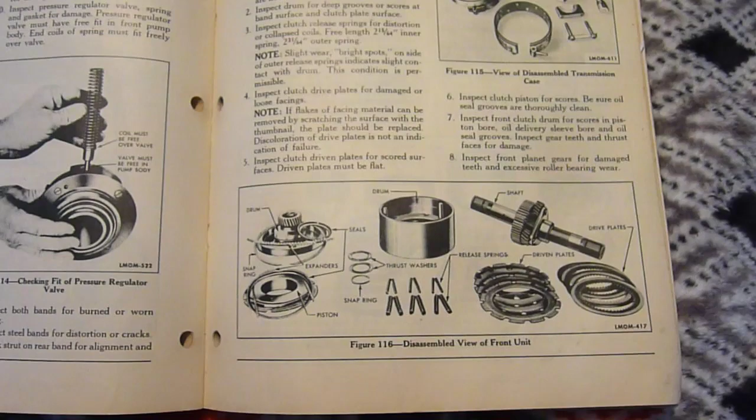So here we have a front hub. It's got springs right there, a pair of springs for each peg. It's got the metal and the fiber plates - these are the metal ones, here's the fiber. Here's the clutch discs, friction plates. They call them drive plates in this manual.

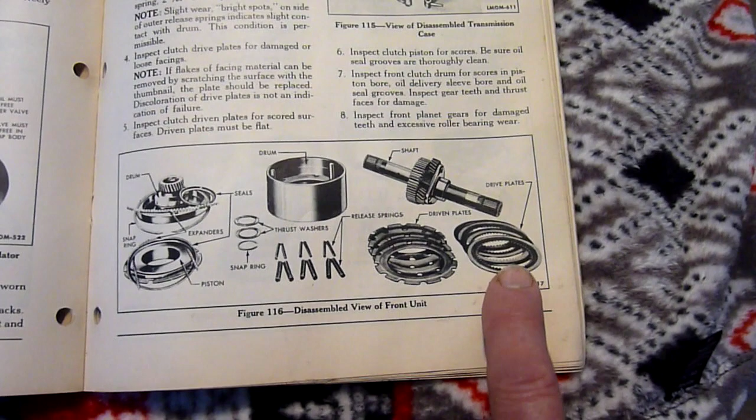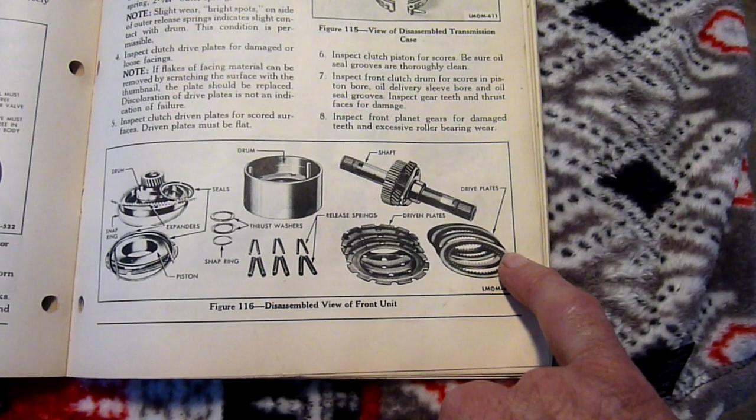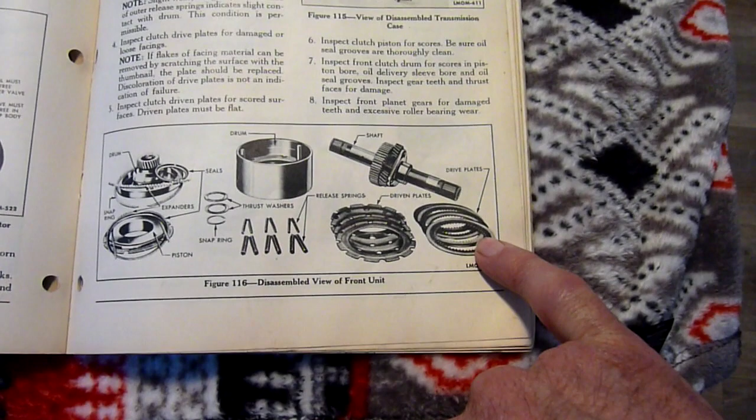This is a Lincoln manual, but it is a Hydramatic transmission. In this one you can see they're showing a dark portion and a light portion - the light is the cork, the dark is the fiber. It goes with the outer, and they're opposite on the opposite side, so it goes with the fiber outside edge up. When you have this down on the bench with the pegs sticking up, it goes inner cork, outer fiber should be visible, and then a metal plate.

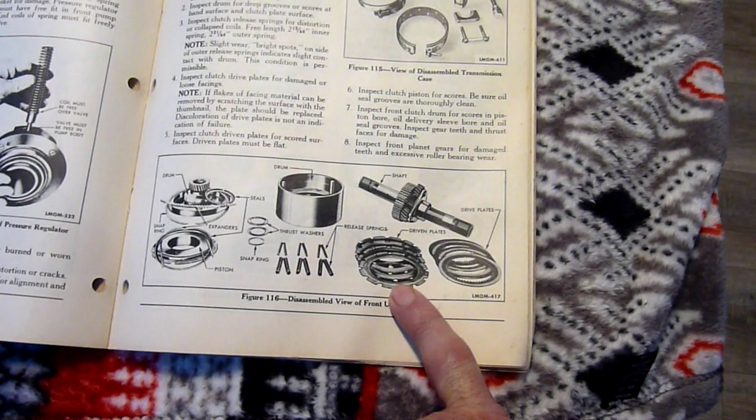One of the older videos - or the newer transmissions, into the 50s - mine is a 52, but 53 and up apparently use a different number of plates, driven plates and friction plates, and also make reference to a cone shape of these plates. Mine does not have that - these are flat. I could not see any difference between them, so it shouldn't matter which way they go in.

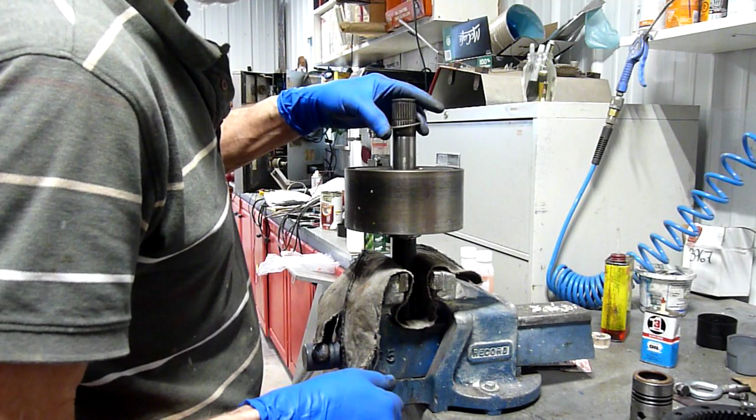So you want these to move freely, so there's a rounded and a squared out portion. The square portion goes over the pegs, and the rounded portion goes over the springs.

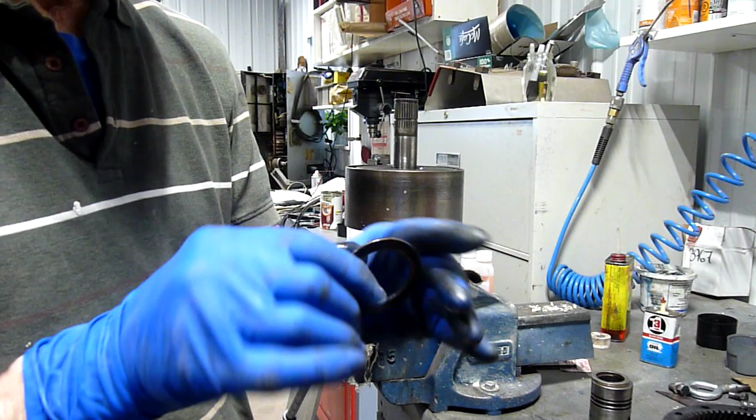When I took this apart, this being the front hub gets a spiral band around it, and this gets a simple unidirectional band - it's the rear hub clutch pack. There was a thrust washer down in there underneath the clip, the retaining clip. The manual makes no mention of it and has no pictures of it, so I'm not sure why it was in there.

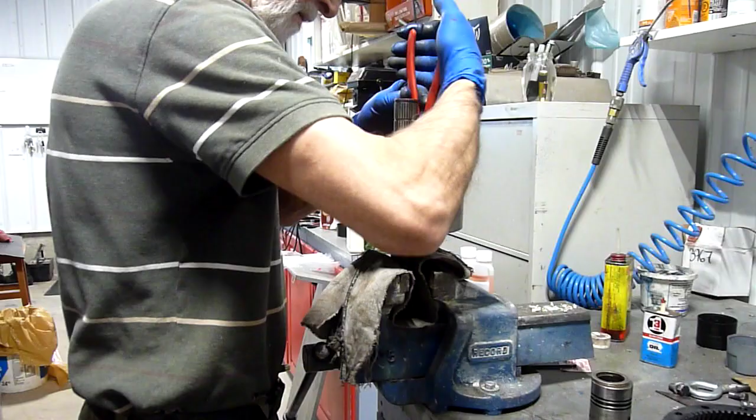I'm leaving it out. I have been trying to illustrate how to reassemble this transmission using old videos and pictures, and it's just not working out. So I thought I would take apart this old one and show you how it comes apart as far as the clutch packs go, and then put it all back together and show you what to check for.

So stay tuned. I'm going to put it in the vise with a rag, clamp it in. I have to take the ring out that holds the rear drum, and then I can take out the oil sleeve and then the front pack as well, and I'll show you how to take those apart.

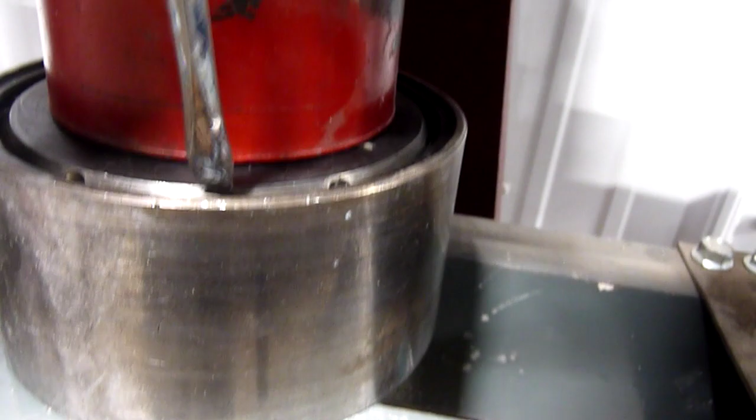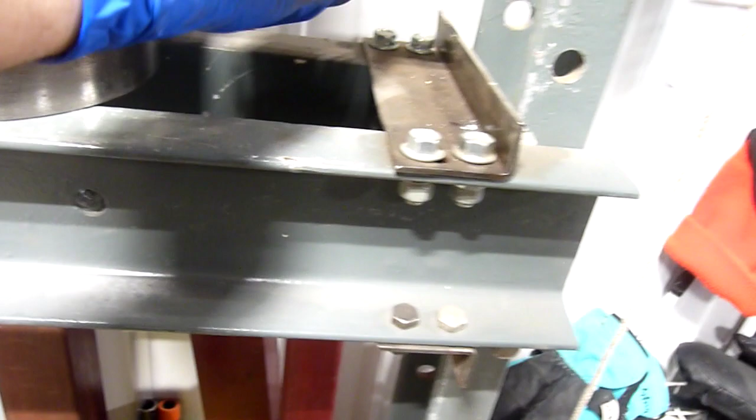When you put it in a vise like this, upright, the rear drum - the rear hub should not drop down as much as this one has. It is missing a clip. But there's a snap ring up here, which I'll use the pliers to take out, and then I'll take the rear drum off.

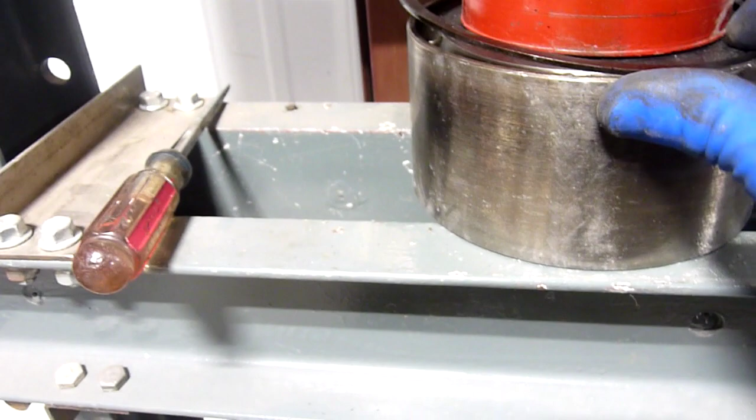Once again, special pliers meant for this kind of snap ring. Off it comes - off comes the drum. Watch the inner spline, or the sun gear that's here - it has to drop down into the friction plates.

Yes, it was missing a ring in here, and I know who left it out. So this steel ring goes on here - it's supposed to actually fit and lock onto these splines. That one's a bit worn, I guess.

Okay, now I got to get that thrust washer out. I'll let gravity do the work. There'll be another ring in there. So here they are - the steel goes towards the inside, away from the oil delivery sleeve. Same with this one on the other end, and then the thrust washer - the thrust washers go against the oil delivery sleeve, like that.

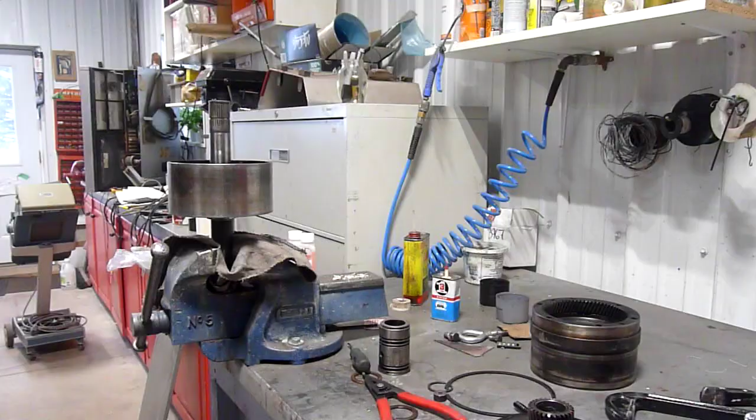And this ring, shown in the manual as well, has a flat spot right there, and that fits on a flat spot inside. So now get that ring off - all we got to do is find the split.

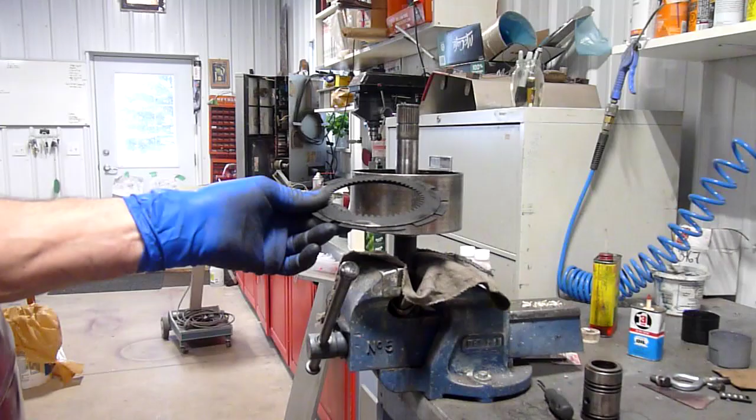The best way to get the drums apart is with a press, and I know not everybody has one. The manual says to use an arbor press, and you don't need a lot of force. You can use a vise, but it's really tricky and I wouldn't advise it - you can damage something using that. So I put a little bit of pressure on this.

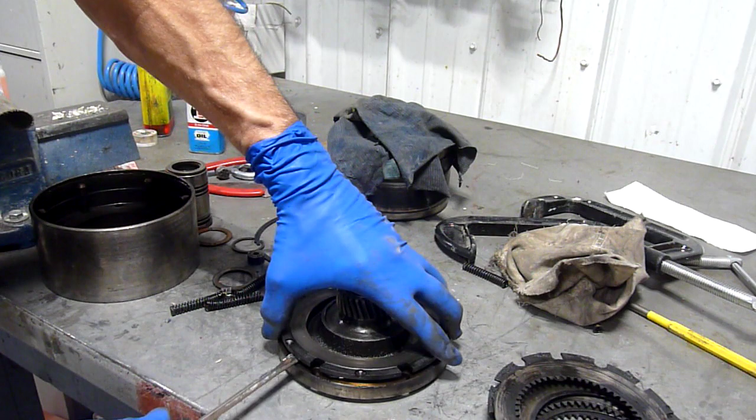The ring is now loose and I should be able to pry it out. All I have to do is get in there with a screwdriver. There we go. And then you just work it around, and that pops out, and you can release the pressure, and it will pop up eventually.

So it appears to be stuck. That's not good.

To be continued. So I had to get this out by turning it upside down, opposite direction to what it is now, and tapping it with a nylon hammer as I spun it. Eventually it came clear, but it has got some damage.

The springs are bent for some reason. These are dual springs, there's an inner and an outer.

Looks like the thrust washer in here is completely sacked. The discs, the friction plates, are in real bad shape.

One thing to note is that the square portion goes around the main peg, and then the springs go into these recesses that are circular. That's where the circular part of the steel disc goes. So I'll take that out of there and show you what they're like.

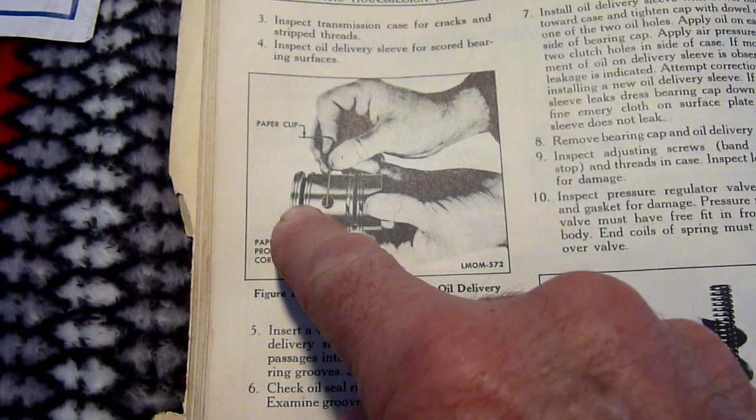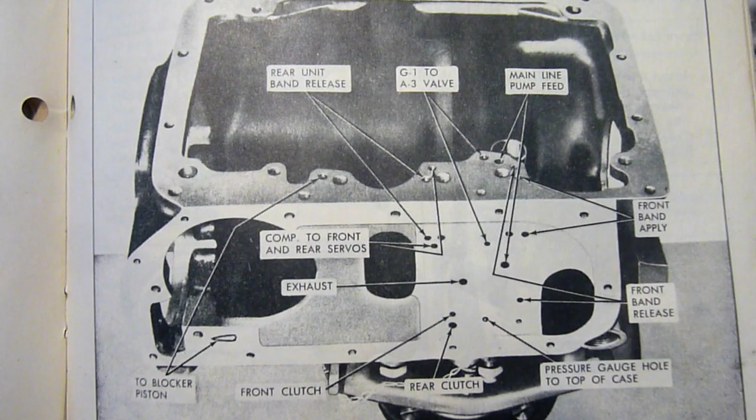So this is looking pretty ugly. And these ones do have a cone shape to them. The replacements I put in my transmission, which is in the car, I'm quite sure were flat. But here's a steel plate, has the round and the square.

Square goes over the pegs that are already in the hub. The round is for the springs. And then the friction plates go on.

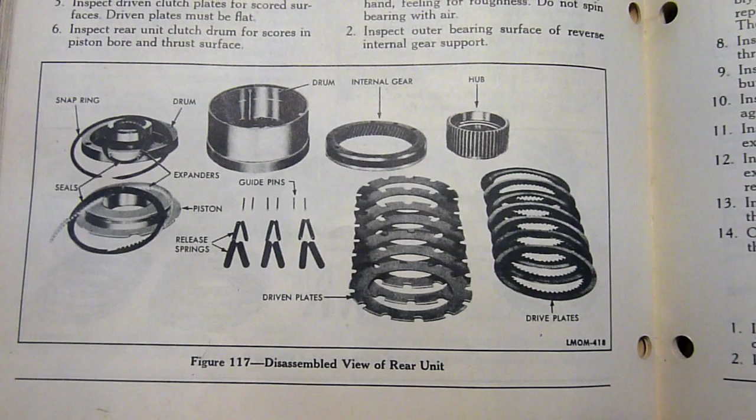So from the way it's sitting now, the friction plates would go friction plate, steel, friction plate, steel, friction plate. The fiber, which you can't see of course on this, is all worn off, would be on the outside, and the cork would be on the inside.

If you take a screwdriver and gently pry on this and pull it up, not creating any marks - looking like there's some badness there too, like the seal's no good.

At this point I think I need two screwdrivers, or pliers and a screwdriver. There we go.

Another bearing surface there. This is just steel on steel with lubrication. See, it's gotten hot. That surface looks pretty good.

Some marks in here, probably from the springs being bent, little bits of grit and so on. And then here is the seal. You can see it's missing a chunk.

And this one has the brass ring expander. The new seals don't seem to use that. So you have to pry that out.

Carefully put a new one in. Use lots of transmission lube. It makes life a lot easier.